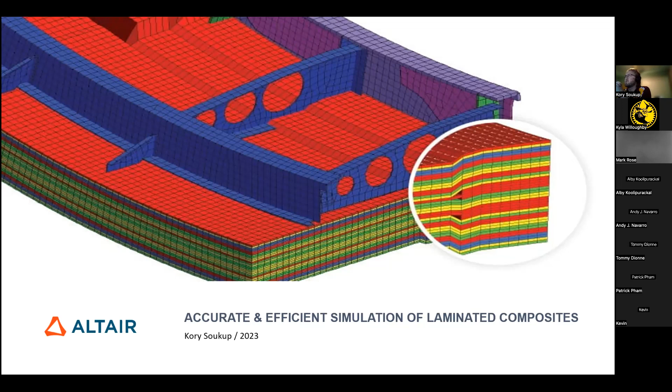So I'm going to start by giving a brief intro into composites for anyone that might be new, freshman, sophomore. If you guys are just getting introduced to this world, it's a pretty cool world. It's riveting. A lot of breakthrough technologies coming out of it. I'm going to demo a model build of a composites model, go through an analysis and post-processing of it. I'm not going to have time in my allotted hour to demo a full optimization problem with composites, but I will walk you guys through what that process looks like. And if you're interested in seeing more, feel free to direct message me and we can schedule some time to do that one-on-one.

I also want to go through some fidelity concerns that people have. I know most places around industry require, and I think even in the BDR, it is required that you submit your composites models using solid elements, aka hexa or tetra elements. That's old news. The aerospace industry is very slow to adopt it, but other industries are already advancing in that you no longer need to model with solid elements. We have this technology where we can model materials within a unit cell, apply that to a shell element or a 2D element, and still not lose any fidelity. I'm going to talk a little bit about that, and hopefully we'll have some time for Q&A.

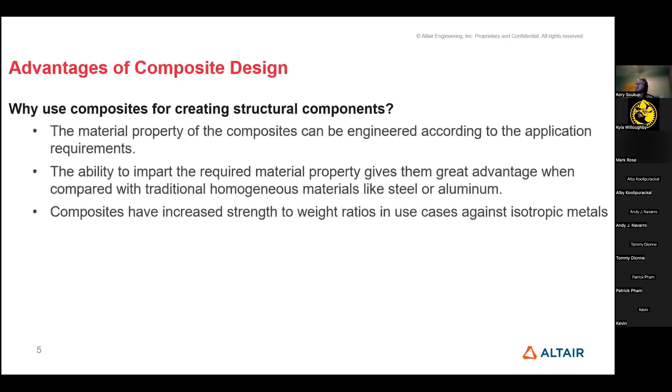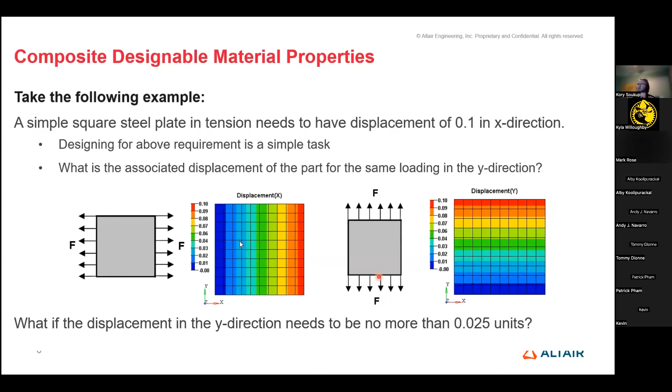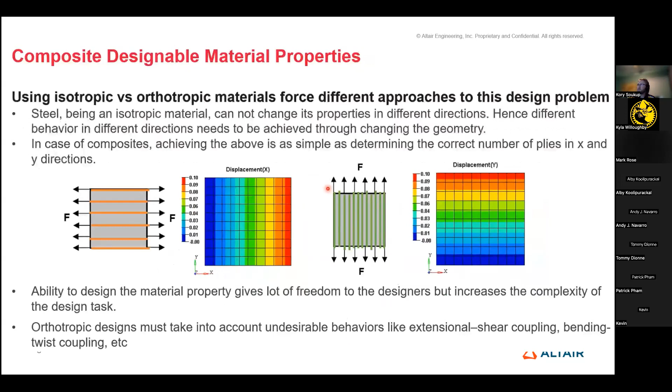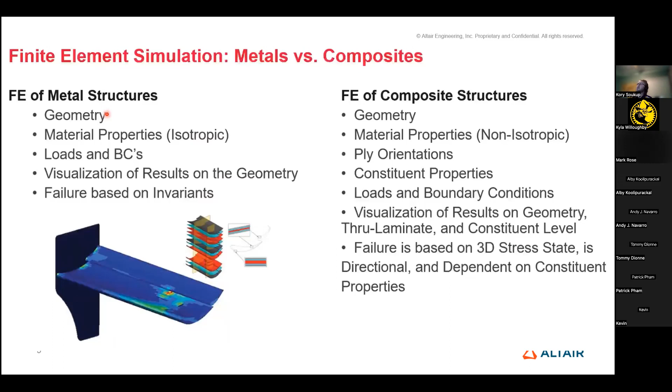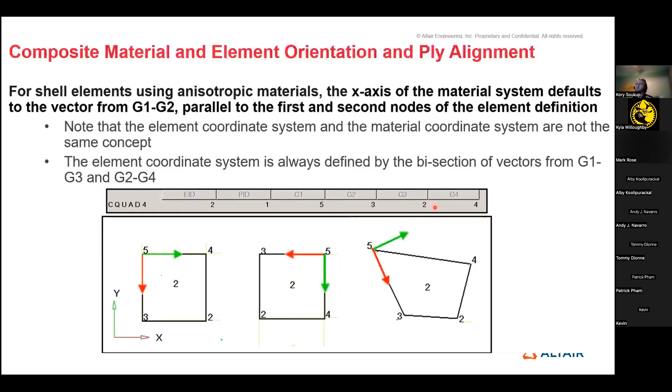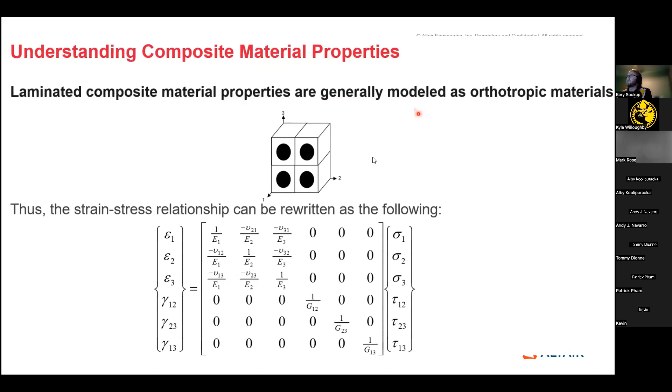And when I was in your shoes, I've seen a lot of teams do their layups without considering the orientation of their plies at all. And no matter how thick you make your part, that's a little bit scary to think about. Because if all of your plies are in the same orientation, it could just be one accident and everything falls apart. It's very important to consider all that.

Okay, getting into the specifics of composites modeling. And again, I know I'm speaking fast. Feel free to let me know if there's questions. Otherwise, hopefully I have some time at the end.

So zone-based data. This is how composites modeling got its start. So back when composites modeling became a thing, we were defining our plies using zones. So I think if I go to the third slide here, this makes it a little bit more clear. We have zone 1, which is this red piece here, zone 2, which is this blue piece, and that's just our ply shape. So this is saying that ply 2 here is only covering this end of my channel there.

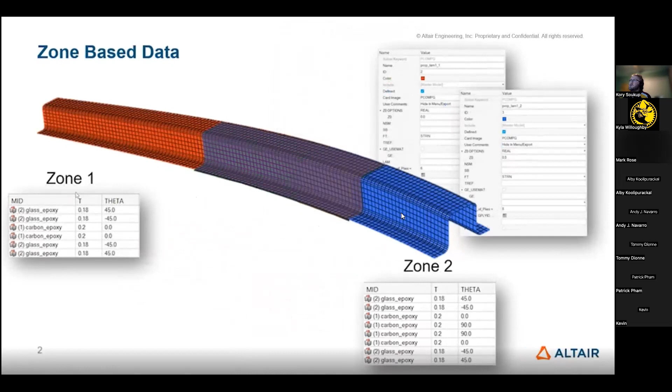If I add another ply that covers the inseam of both of those, I'm looking at 4 zones, right? Because zone 1 and zone 2 have different thicknesses, potentially. So when I add a third ply there, I've now got a different thickness in each of these areas. So now I'm having 4 zones and only 3 plies. This can get a little bit complicated, right? So actually, let me see if I can open up the paint tool. Awesome.

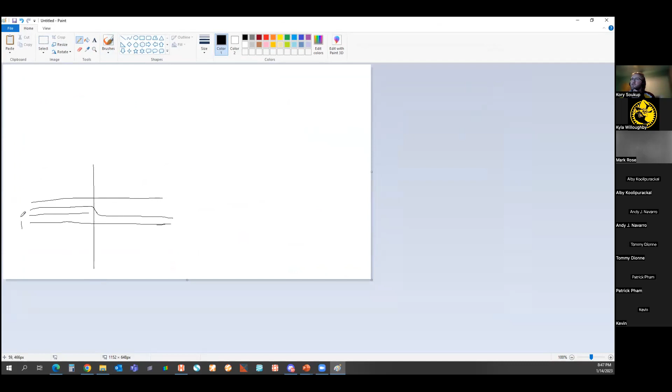So how do I explain this? So if you imagine, let's say I have a ply here, I've got another ply here, and I've got another ply that does something like this. And then we'll just give it one more over the top. Obviously, this is giving us 2 zones, right? Over here, we've got ply 1, 2, 3, and 4. Sorry, that's a little sloppy. Over here, we just have 1, 2, and 3, right?

But you probably noticed that my ply ID of 3 over here doesn't match my ply ID of 4 over here. And this was the inherent problem with zone-based modeling, because if you wanted to quickly change your laminate and you deleted ply 3, you're not deleting ply 4 over here, and now everything is messed up. So then came along something called the PCOMPG, which is global zone-based modeling, or global IDs. And essentially, that got rid of this difference in naming convention, and we were left with 1, 3, 4 over here, right? So now I still only have 3 plies in this zone, but it still recognizes the same ID across.

And this is PCOMPG. It's still widely used in industry. In fact, a lot of people will choose to build their models with ply-based modeling, which I'll get into, and then convert it back to zone-based to solve in other solvers like ANSYS, Nastran, Dyna, etc. But if you're solving in OptiStruct, which is what I'm going to do, there's a much cleaner way, which is called ply-based modeling. And that actually doesn't require us to even define a zone here. So you can eliminate that there. And we're just going to define the plies as they are.

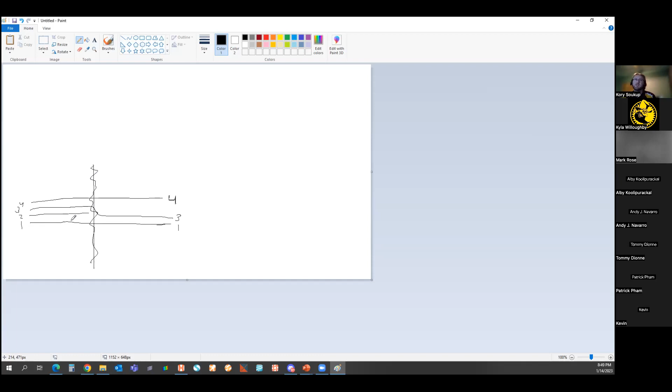So when you build a ply-based model, you're building it as you would on a manufacturing floor. You're defining 1 ply at a time and stacking them in sequence. And you'll see that here as we move forward. I see there's a question here. Is it a good idea to use isotropic properties if using a quasi-isotropic layup instead of getting material properties for orthotropic plies from physical testing?

That's a good question. I personally would say no, simply because of the lack of concern for constituent properties in that case. You could, as a baseline, if you're just doing some initial tests at the start of your design, you could certainly assume isotropic properties for some laminates there.

But even in a quasi-isotropic layup like that, I would venture against it for sure on your final report. It's a good idea to speed up your initial baselines though, and I know I've done that plenty.

So here's ply-based modeling. We're essentially going to define all of these as single plies, right? You don't see any broken up zones here. And if you zoom in where those two zones were separated in the first example, all you're seeing is a ply drop, right?

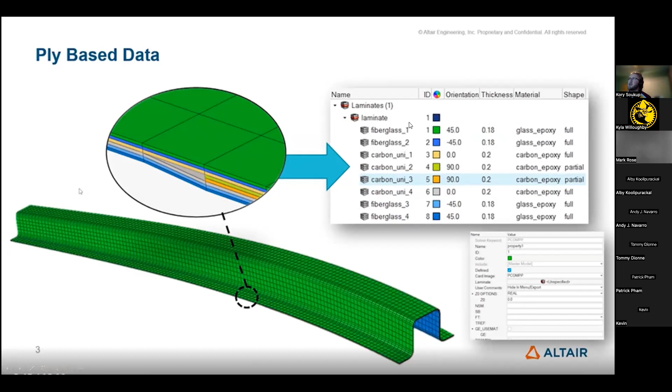So we've got these two extra plies over here in this zone that aren't present over here. This ply drop you see here, this void, is nothing to worry about in your mesh, because what you're seeing is simply a 3D visualization of 2D elements. It's a little misleading, but these aren't 3D elements. We're modeling everything with one 2D sheet and then assigning plies or layers on top of those elements.

So I'm going to skip through these and quickly show this here—typical modeling workflow. We're going to define our stacking direction, which is very important, and that's dependent on your element normals. So that'll be your stacking direction.

Of course I mentioned we want to define our material orientation. We'll create our plies, defining their thickness, material, and shape—which would be those zone 1, zone 2 areas. We'll define all of those plies into a laminate, then create our template with solver-specific attributes. For Optistruct specifically, we'd use PCOMP-P; if you're using Dyna, you might use PCOMP-G, but there's other terminology out there.

And of course, draping simulation is very important at the end as well, because especially on a curved piece like this, if I were to drape a piece of carbon over the top of this, the orientation I'm laying my carbon in isn't necessarily the orientation it will end up in, because it stretches around those curves.

Your fibers will change direction ever so slightly. And of course, you're not going to be cutting out a simple rectangle here—your shape is going to look something like this. So doing a draping simulation gives you a lot of information, so you're not wasting too much dry material before your wet layup.

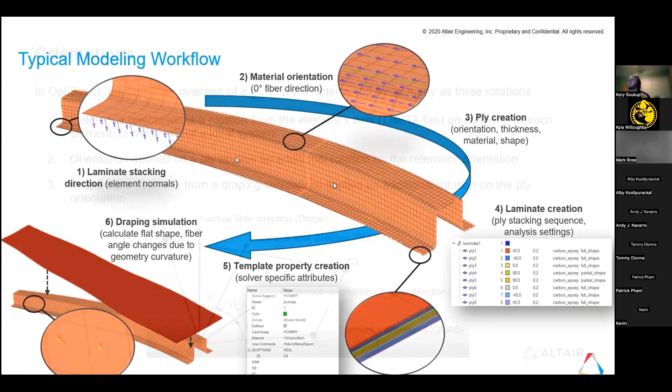All right, so back to orientations—this is just off of that draping concept I just mentioned. Obviously every element has its direction, G1 to G2, that's your element x direction. Then you have your reference orientation, which by default is always your 0-degree fiber orientation.

Your fiber direction then is going to be your ply, right? So if you have a 0-degree ply, this theta here, theta k, will be 0—same as this one here. But if your nominal fiber orientation is 45, then this theta will be 45. Then of course you get an extra theta change based on your drape.

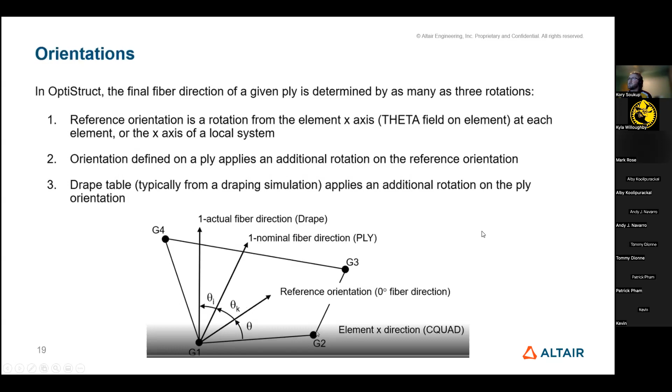So let me jump out of this now and open up the tool here. I've got that same model I showed in those slides, which I figured would make for a quick demo to show you guys.

And I know I'm already almost halfway through here, so I'm going to move fast. As we talked about, one of the first steps in any model definition is checking my element normals. If you're not familiar with FEM, don't worry about the mesh here or how I got the mesh.

If you guys want a quick dry run or short course on meshing techniques and how to properly mesh models for different types of analyses—because your meshing is very different for CFD than it is for a structural model.

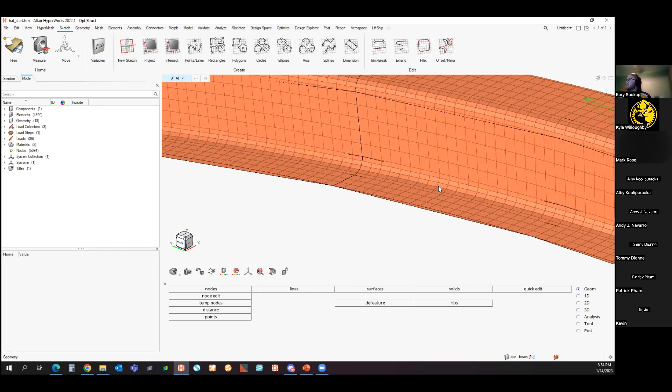But here, if I zoom in, you'll notice that in this model we just have some 2D elements, right? No 3D hexes, no tetras, nothing like that in this model yet. All I've got is the surface and some 2D elements there.

First thing I want to do is check my element normals. Again, I'm not going to treat this as a full training, so I'll move quickly through the button clicks here. We can give you training later on if you reach out, but I'm just going to demo what we're doing here.

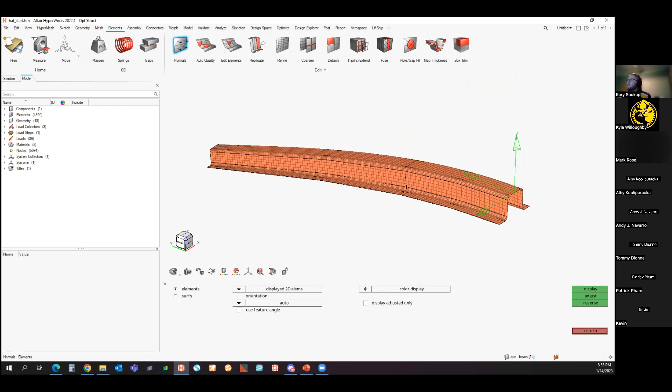So I'm going to view my element normals here. You can see that I've got this red and blue. Red is the positive direction of my vector.

Let me try to change this here, make it a little bit more clear. So if I zoom in here, you see my positive direction is pointing outwards there. I'm just going to go ahead and reverse that. I'm going to treat this as the inside of my mold, and I'm going to lay my plies on the inside of the space here. So I want my direction facing inward, like you see there.

All right, next thing I want to do is open up Composites browser here. And I'm going to create a material reference orientation. This is to make sure that all my elements are facing the same direction.

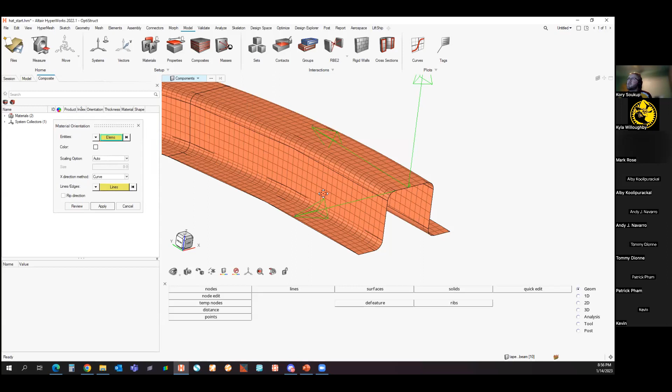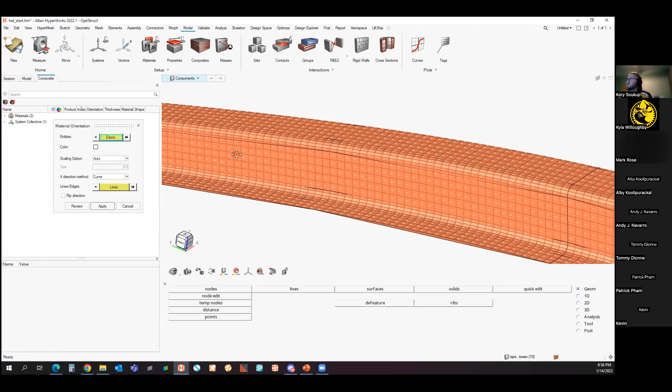So let's select all my elements to start here. All right, so I'm just hitting review to start. This is what my elements look like from the get-go, and this is the default, using my system axis here. So I could assign everything to my system ID, which would just be selecting that there. And I can put in custom or local rosettes - local coordinate systems anywhere I want in my model to change my orientation there.

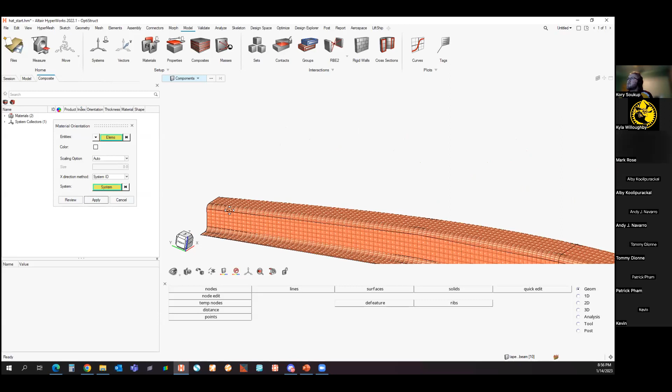So if I hit apply, you'll see that doesn't change, because this rosette is set to the same orientation as my global axis here for the most part, at least in the Y and Z there. Now, if I change - let's do this.

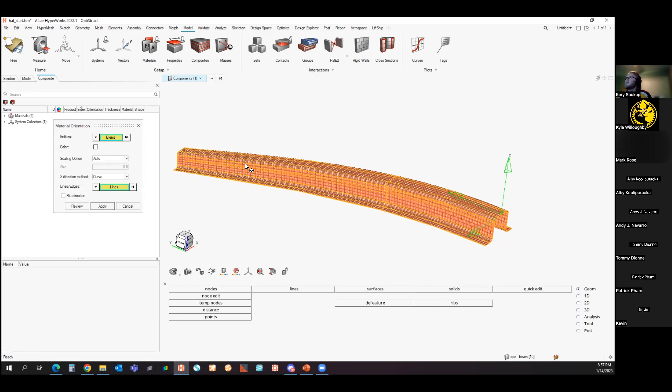All right, I'm going to change this to curve, and I'm going to select my lines. I'm going to change a setting in here that I don't necessarily like. All right, let's try that again.

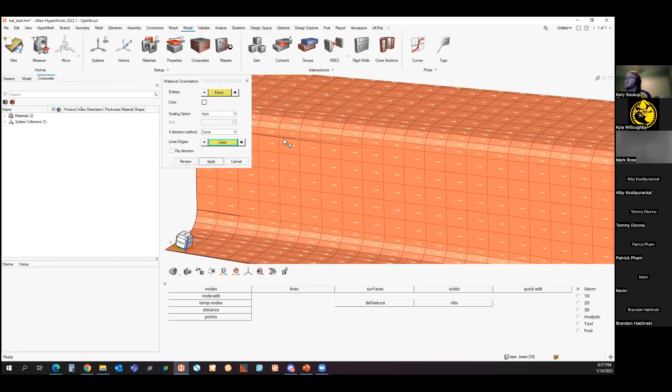There we go. Select my two lines, and let's hit apply. Now, if I zoom in here, you'll see that all my orientations follow that curvature. There's a bending up here because of the bend of this piece.

I'm actually going to flip the direction though, so everything's facing over in this direction still. So now it's following that curvature. That's what I want. I'll go ahead and hit apply, close that, and my material orientation is set. So that's going to be my default zero direction.

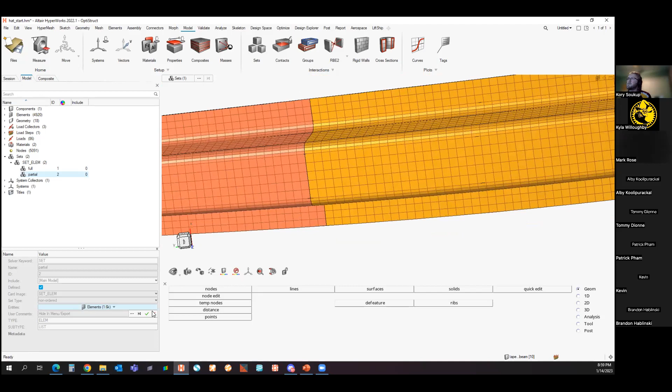And I'll create a second one here and we'll call it partial. And this is just gonna be this piece over here. All right, I think I got it all there. Hit OK. So now I've got my two shapes there.

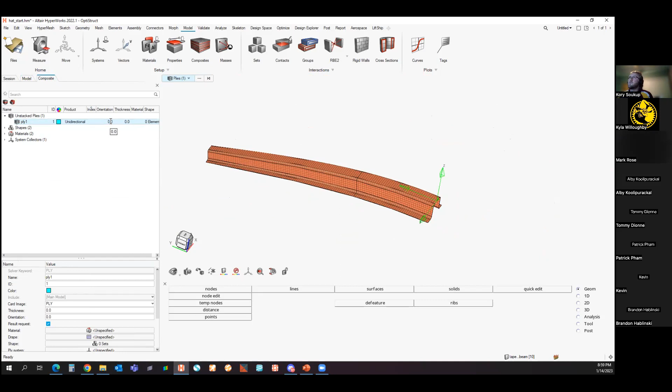So now I'm going to use those shapes to go ahead and create some plies. So ply 1 here, we'll leave my orientation at 45 degrees. We'll give it a thickness of say 0.2. I'm going to assign my material here as carbon epoxy, and that material I already had predefined here to save time.

But essentially what I've done is I've created two materials, carbon and fiberglass, and I've defined their properties down here. Both Mat 8 cards you see here, that's telling me that I need orthotropic properties assigned to both of those. So those are defined.

One thing I'll mention on this too, and this is a little bit different from what you probably saw earlier in Eric's presentation, is that HyperWorks here, being that it's a different interface, is completely unitless. So any model you bring in from CAD, if you're using the metric system or imperial system, it's going to come in that system. So all of your dimensions, all of your material properties need to remain consistent within that measurement system.

But if you want to change it, it's up to you to go in and modify these values accordingly. The default is always going to be steel - if it's blank and then populates a default number, that's the steel value of that number. But again, it's unitless. It's up to you to make sure that everything is consistent. It's not going to error out if you've put E1 with the imperial units and E2 with metric units - it doesn't know the difference. So it's up to you to make sure everything's consistent.

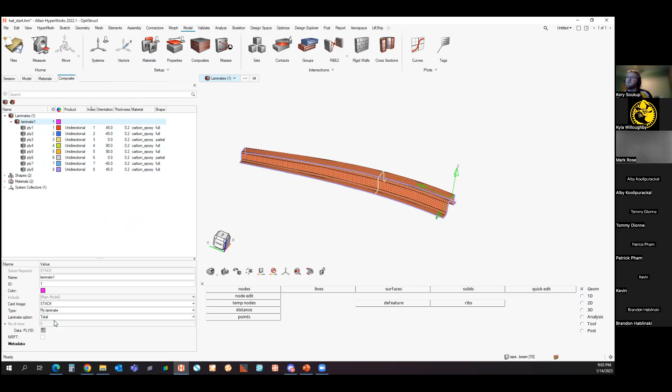Well, let me hold off on that for now. Show you guys what this looks like. So I've got my laminate built.

One more thing I need to do is define a property, and this is for the solver that you're going to be running it on. So if it's Optistruct, you want to use the pcomp-p. pcomp-g, pcomp, and pcomp-ls are all available as well. LS is what you're going to use if you are modeling with solid core material.

So typically for these competitions and the teams I talk to, if you're going to be modeling with the core material, you want that core to be modeled as a solid element, and then your shell elements will be around it. So your pcomp LS will be defined or assigned to your core, and your pcomp P will be assigned to your actual plies.

And I'm going to kind of skip over that for now, just because I don't know how much time that would take to go into detail on. I'm going to assign this pcomp P, and then this is just going to be my Z offset. So I'm going to set that to 0.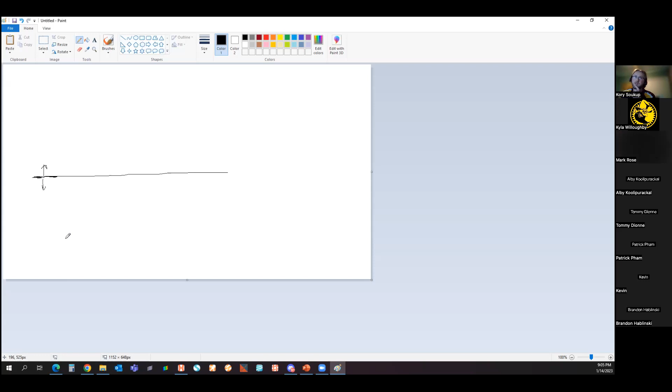Again, to be clear about what I'm doing there. If this is my surface that I've meshed, by default, when I assign my laminate to those elements, half of them are going to be on this side and half on this side. So this is the midplane of my composite, right? If I set Z0 equal to 0, it's telling me to stack from the 0 point of my elements in the element normal direction. So if my element normal is facing up, it's going to start here at Z equals 0 and stack up, ply 1, 2, 3, and so on in that direction.

If I had Z equals minus T over 2, so minus half of the thickness, then of course it would start down here, and that's the default. It's a lot of different options you have there.

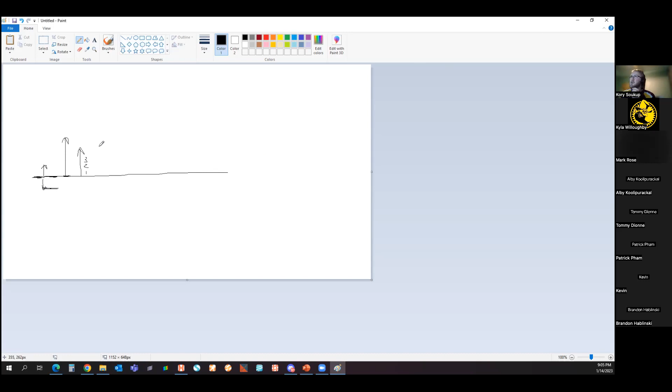And this becomes important if you're dealing with interface laminates, right? So for example, an I-beam, right? How would you model this with composites? The element normal here might be going in this direction. Here it might be going in this direction, right? So what happens when you have a ply that wraps around these two here? These elements are now being stacked, or these plies are being stacked in a different direction than these elements here, right? So then that's when we use something called interface laminates, and we can readjust these parameters here.

Again, I'm not going to go into that much detail on this model. We'll keep it very, very simple here. So Z0, that's what we want there. And that should be all we need just to visualize it.

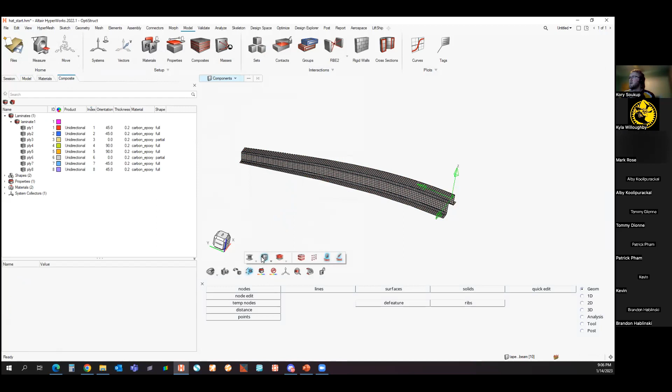So now what I can do is change this to property view, and I can show you guys what this now looks like. Did I assign? Oh, hold on. I need to assign my property to my component here.

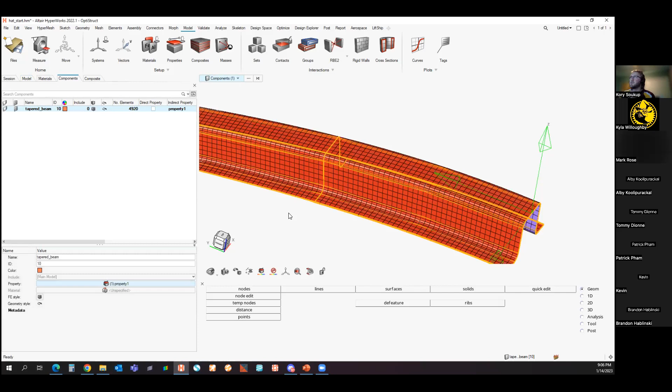It's easy to forget the little things. All right, so here's my laminate that I just created. Remember, plies 3 and 6 are the two plies that I only assigned to the partial side here. So this here is the ply drop.

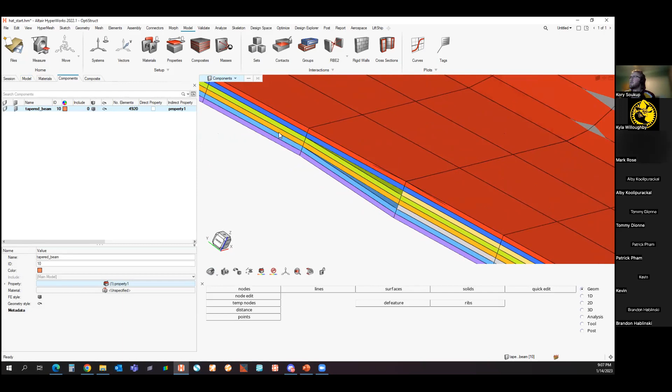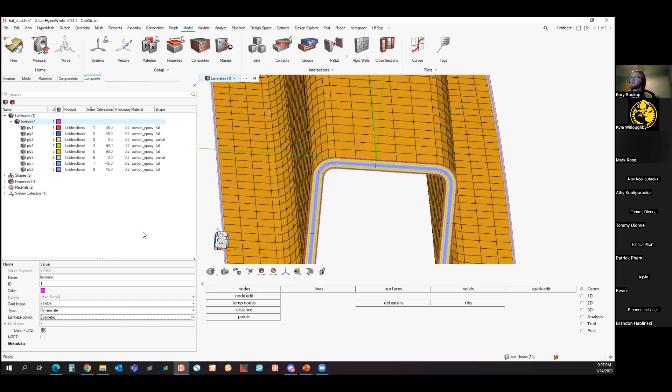So I've got a thinner laminate over here than I do over here. If I go over here again, you can see the plies a little bit more clearly on that end. Now, if I change my laminate to be symmetric, you can see that thickness just doubled. I've just made my laminate symmetric around Z equals 0, so I've got those voids on the top and bottom there, my center plane.

But again, remember, this is only a visualization. If I turn off these features, I'm still looking at shell elements. All of my boundary conditions, constraints, loads, everything is assigned to these elements here. I don't have to worry about assigning everything to those 3D spaces on the side. Those are just for visualization purposes.

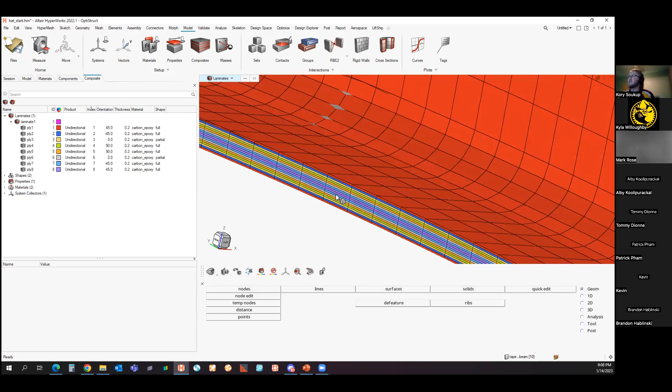All right, so my model is defined. Before I run my analysis, let me skip a step here and show you a couple other things that are in this interface before I leave. And that would be one being the draping. So let me show that first.

If I right click on laminate here and go to drape, this is where I can define my ply shapes, my drape angles. So what I'm going to do here is turn off these first.

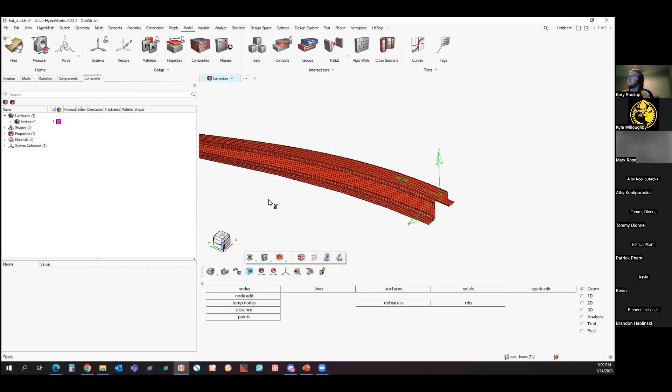Go back to drape. I'm going to select my seed point - this is just the point where your ply is going to touch the part first, where it's going to touch the mold first. So we'll say I lay it down right there. I'll hit apply, and this will give me all those flat patterns that you guys really need for your manufacturing.

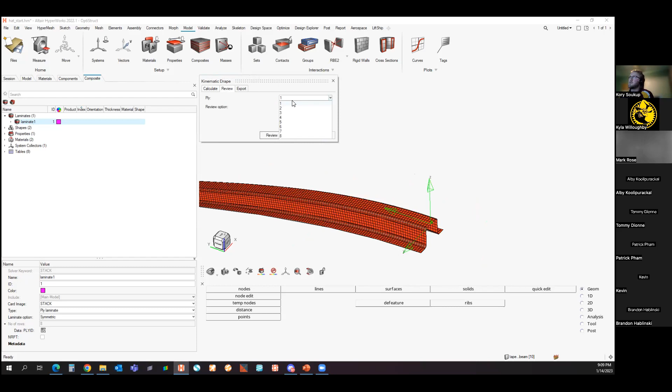So right now it's going through all 16 plies that I have in my model there. For example, go to ply 3. Let's review the drape mesh - that's what my draping is going to look like. You can see the orientation changes ever so slightly.

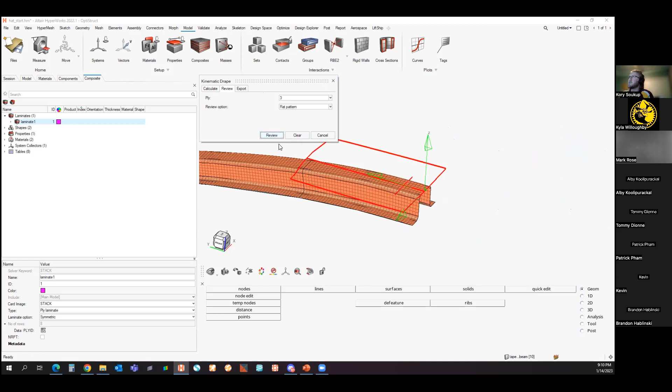If I go to the shear, this is going to give me the shear pattern on that particular ply. And I can also take a look at the flat pattern - that's the actual shape that I want to cut out. And I believe this was ply 3, which was in the 0 orientation.

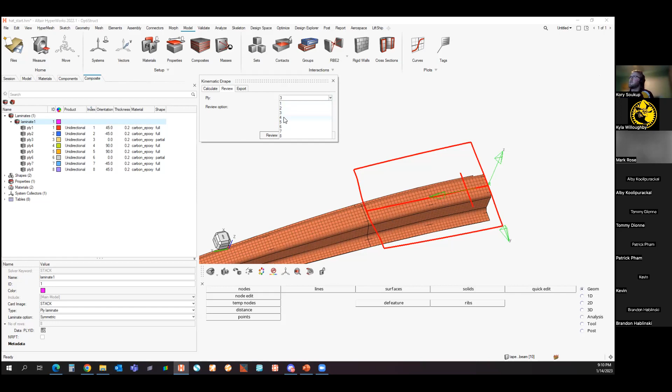No, so this makes sense - I'm cutting it in this shape, and this here is pointing in the fiber direction. So I want my fibers in that 0 orientation that I defined previously. If I go to ply, let's go to 90 - so ply 4. Now you're seeing my orientation is in the 90 and my ply shape here.

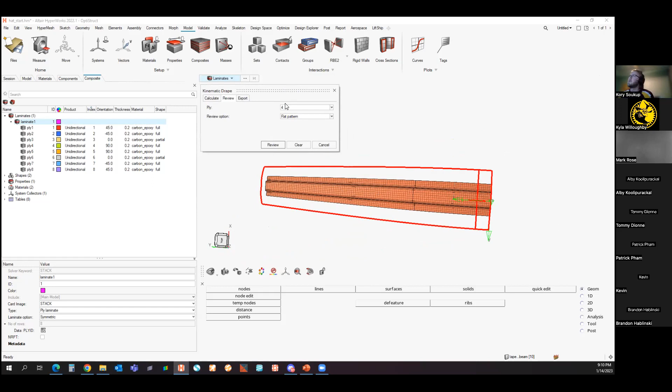And of course, I can export these as DXF files, so you can use them to trace and cut your plies in the clean room when you're building your part. So it makes it very quick, very easy, and you're no longer wasting so much dry material in your labs. I know that's hard to come by on those student teams, relying on sponsors and all.

Let's see what else. I want to show the stress toolbox here. This is not new, but it's something we've changed recently to make it more accessible.

And what I can do is go into my laminate here, I'm going to analyze engineering constants. This allows me to take a look at all of my matrices for that laminate in both zone 1 and zone 2. So this is for zone 1, I've got 12 plies. I've got my ABD matrices here.

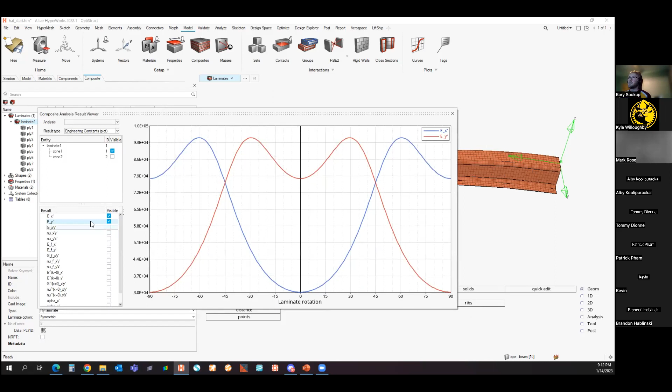I can change this to a plot, so I can take a look at my stiffness in the fiber orientation, my stiffness in the matrix direction, and understand that my 0-degree plies were over on this piece here. So for zone 1, my strength in EX should be actually very low in the 0 orientation, because all my 0 plies are in this shape here. But it should be strong in 0 for zone 2.

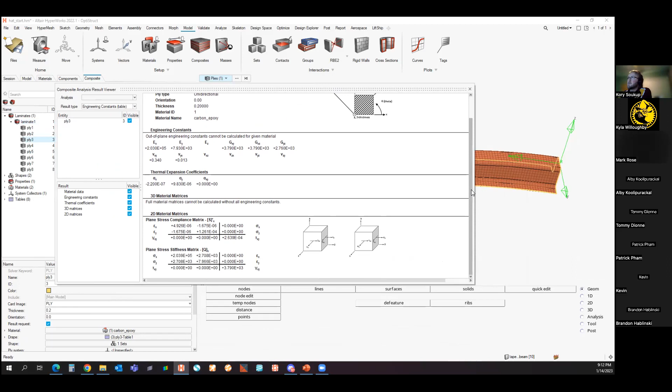So let me actually look at a ply here. If I open up ply 3 and do that same thing - yeah, so again, we've got our out of plane constants, our 2D and 3D matrices there, our homogeneous matrices. Let me look at EX. So yeah, for that particular ply, of course, we're strongest in the 0 direction. In EY, we're going to be weakest in 0, maxing at 90. So that's exactly what we'd expect for that particular ply.

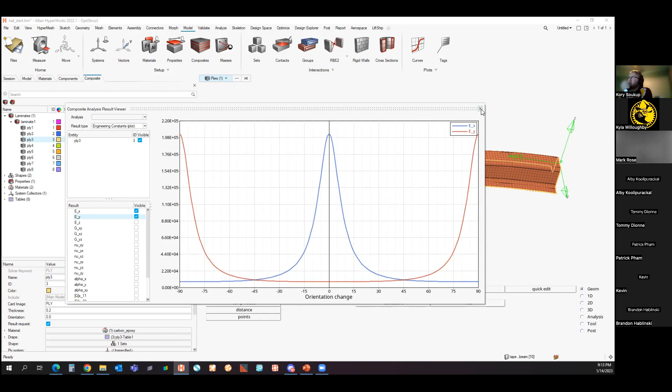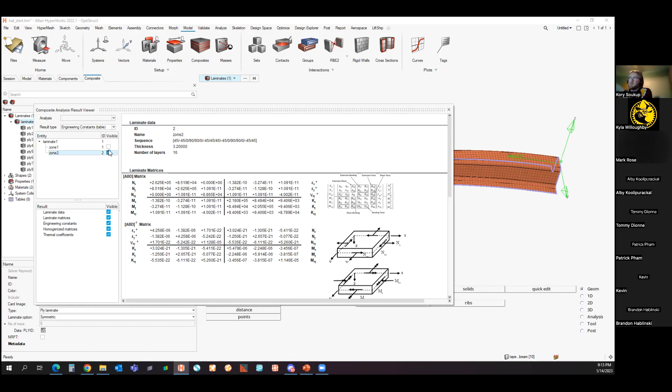So this will tell us, if we're looking at it at the laminate level, in which direction are we weak. We'll figure out our weak point and make sure that we're not going to experience any loads in that direction, whether it's tension, compression, or whatnot. And all of these results are given for both tension and compression if you're building them with the material modeler that's in-house here, which I'll show briefly in a bit.

I'm trying to think if there's anything else I wanted to show before I move on here. One thing - I know a lot of you guys don't solve your solutions with Optistruct. If that's the case, I don't want to be biased.

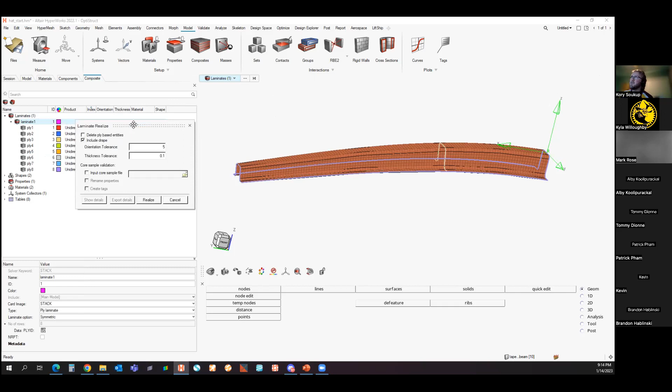So if you wanted to build your model like this and then solve it in, say, ANSYS, Dyna, Nastran, whatever you have, what I would do is build your model just like I did here. Then I'm going to right click on my laminate and say realize. This changes it back to that zone-based definition I talked about, that PCOMPG property. That solver deck can be imported into ANSYS, for example, or Dyna, and you can use it to solve the model there.

Otherwise, if you're in HyperWorks, you might as well use Optistruct - it's right there for you. But it's completely up to you guys.

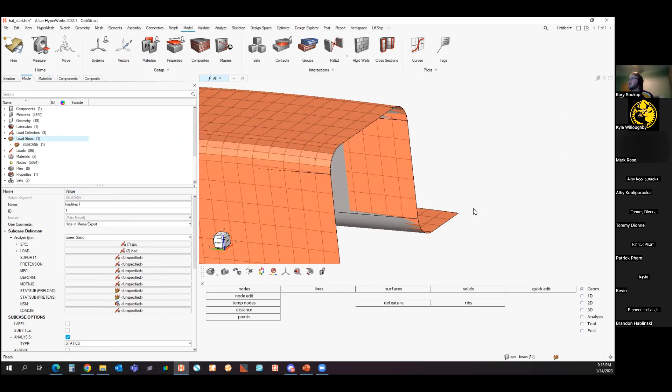So with that being said, let me go ahead and run this quick. Let me show you the loads assigned to it so you know what's happening here. Over here on the right-hand side I've got all my constraints - I'm constraining that end, and I am loading this end in compression. So all of these nodes have a loading that is pointing in the inward direction.

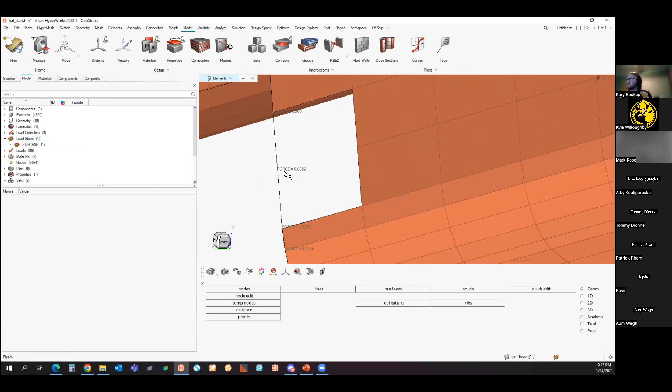So if I - hold on a second. Yep, yeah, it's all pointing inward. So this is in compression. Just wanted to make sure I wasn't going crazy there. So that's the setup I have here.

Another thing I want to do before I run this is make sure I request the proper output for a composite solution. So I want my composite strain and my composite stress, both in H3D formats.

Here it's going to ask for type, and also for number of divisions - this is for each individual ply, so I can look at results on ply 1, ply 2, ply 3. If I increase this value to say 2 or 3, that's how many times it divides that individual ply up, so we can get the peak stress or peak strain at the top and bottom of the ply, which becomes very important if you're focusing on the constituents. For your case on these cars, I would just leave that at 1.

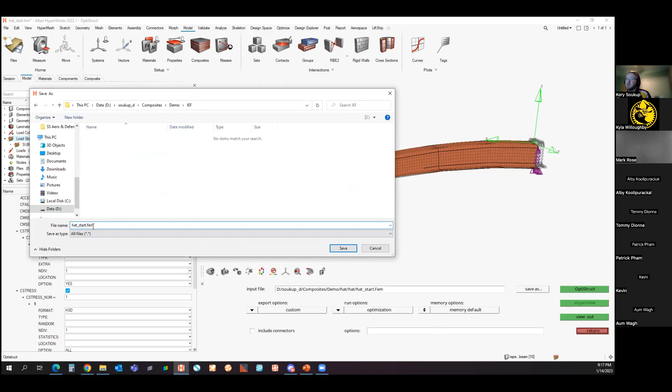But with that being said, we'll go ahead and run it here. I'm going to put this in - let me create a new folder called IEF, and we'll give it a 22. This should run fairly quickly, in a matter of 10-20 seconds, and then you can take a look at those results here.

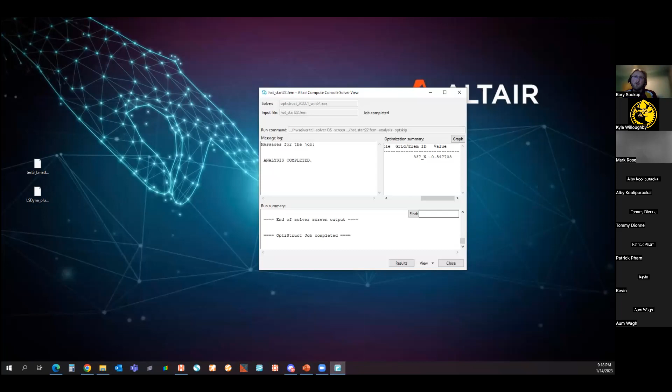I don't know what happened to it. Oh, there it is - it's hiding on my other monitor. All right, so that ran pretty quickly. It's already done, we can take a look at our output file quick.

Gives you some model information here, number of elements, etc. Okay, so this is what I want - here's my volume, mass, there's my stiffness information.

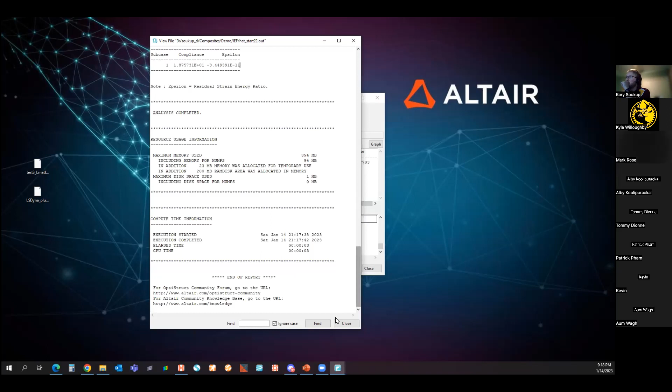All right, let's go ahead and open that up again, and I'm going to open a new page here in my session, and we'll pull those results in to take a look at how our piece did under loading.

Again, we only had the one sub case here, so that's the only thing we need to worry about. We'll take a look at our composite strain. Simple - let's turn on our mesh again so we can see where our strain is happening here. So this is obviously our peak strain. I can take a look at this for individual plies.

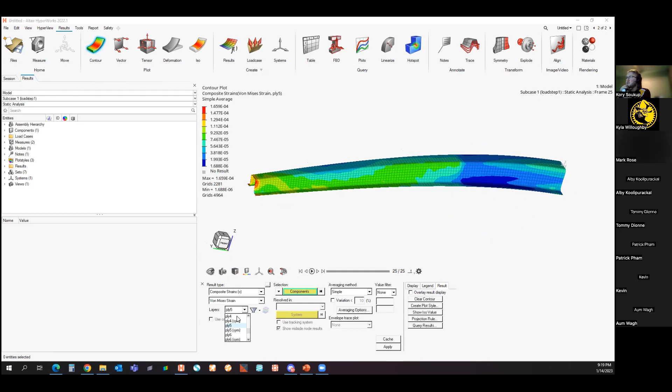So maybe we'll go to ply 5 here, see what that looks like. And I can jump between every single ply in my laminate and take a look at the stresses and strains on each individual one.

Maybe I want to take a look at the total displacement for the entire laminate. I can animate that - maybe we'll scale that up so you can actually see what it's doing there. Remember it's constrained on this end and it's in compression over here, so it is behaving how we'd expect - so we've got our sanity check there.

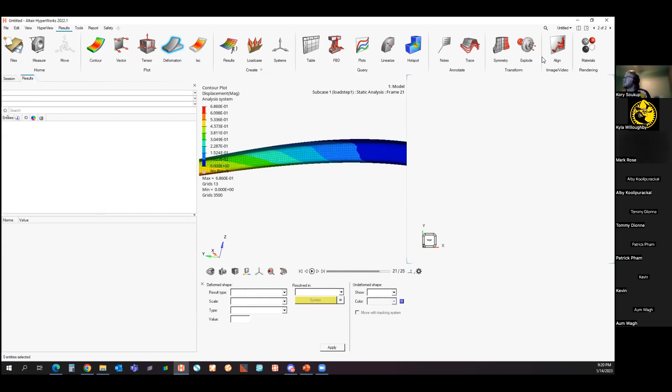But I can go through and modify this. Maybe one thing I can do here is create another window, and let's jump back to my model here. And I'm going to change - let's get rid of this symmetric definition here, right? So now, again, we've only got the 8 plies now.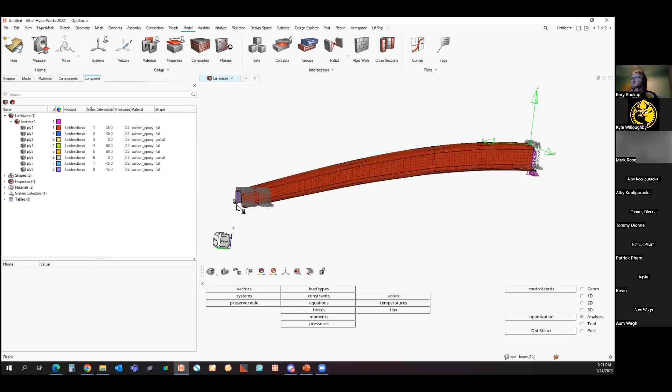If I zoom in here, you'll see I've only got the 8 plies now. There's 6 on this side. There should be 8 over here on the other end. Yep. So now we'll go ahead and run that one as it is. I'll just say 8 plies.

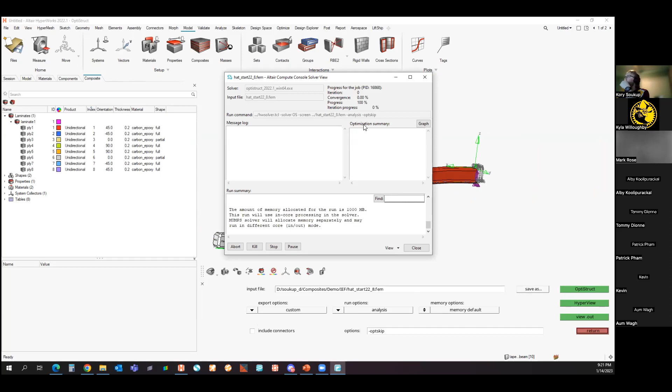And there it is. So again, should run pretty quick. Go ahead and close that. Open up our post processor again.

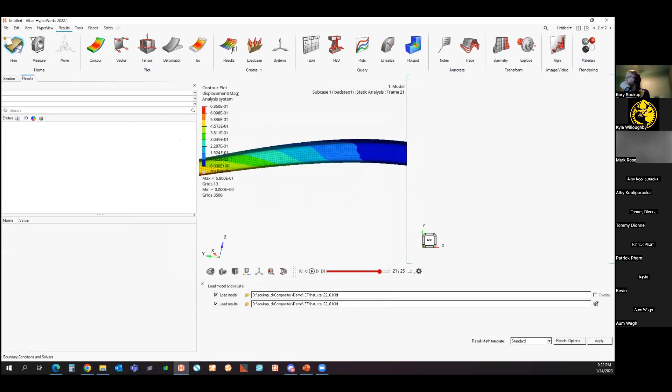All right. And we'll compare our displacements. Peak displacement over here was 2.6. Over here, we're looking at 0.7. So obviously by taking away those extra 8 plies, we got a much weaker part. So we can go ahead and compare those side by side like that.

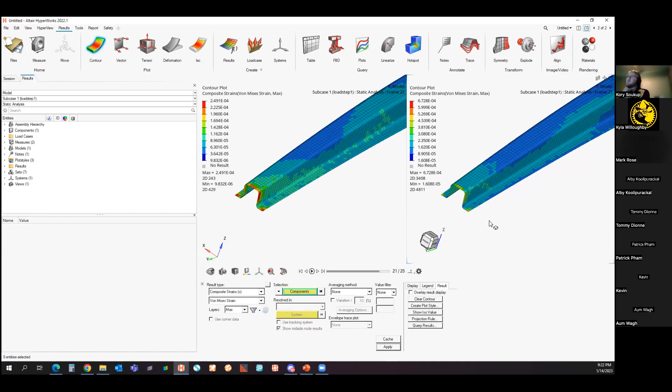So very good comparison. Nice tool to utilize to make sure you're understanding your results and defining everything appropriately. Since we've got about 10 minutes left here, I want to just quickly breeze through these other topics here, talking about fidelity that I promised. And then we'll get into some Q&A.

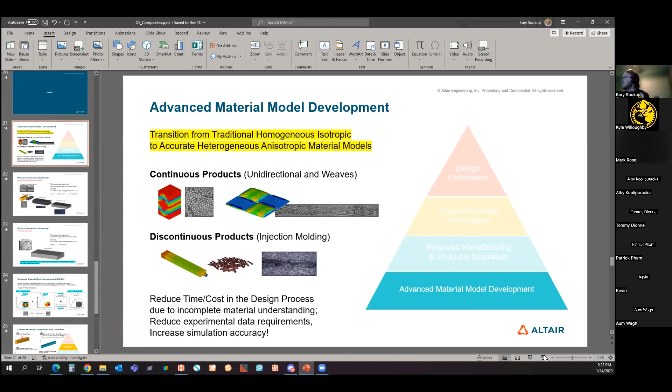All right. So this is something not necessarily new, but it is something that is just starting to take hold in industry. So I'll say if you guys can learn the concept of multi-scale modeling, it's going to put you in the front of the line when it comes to pursuing a career in composites, because this is the technology that every industry wants right now, and is just learning about.

So essentially what we're going to be doing is modeling even core. Everything we need to model can be modeled with shell elements, no longer a need for solids. And what we're going to do is create a single unit cell, a material model that we're going to plug in. Instead of our MAT 8 card, we'll create a MAT MDS card and plug that material model into our model

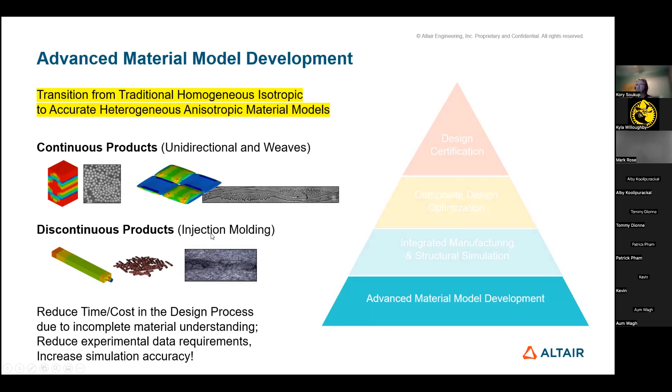to give our 2D elements a definition of a 3D unit cell that is in itself modeled with 3D tetras or hexas. So we're not losing any fidelity. We just got it pulling information from another tool, from another material database. And this can be used for unidirectional, continuous products, as well as discontinuous products like injection molding. So very widespread.

And this is the general idea that you should understand here, that everything comes in a scale. So let me jump to this slide first. This is a typical example of a metal, right? You probably heard the term black aluminum, right? Black aluminum is this idea that even when we're dealing with composites, we can treat the entire laminate as a homogeneous part, as an isotropic part, we just assume that this is one material model. We average everything through the plies and we just do our analysis on the laminate.

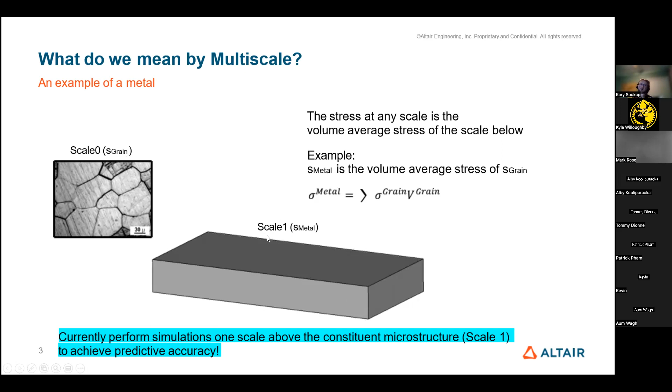That is not okay anymore. That's how things used to be done, and that's how metals are done. So we were under the assumption that that's okay. The understanding here is that obviously scale 1 is the average of all the stresses and strains on the scale below it, right? So in the metals case here, we've got our grains and boundaries averaged all together gives us scale 1, or the ply level in metals, right?

In a composites case, scale 1 is not the ply level. Scale 1 is fibers and matrix. That's our individual constituents. So up till today, we've been modeling everything at the laminate level, even the ply level in some cases now, but we're still building our boundary conditions and solving our models at the ply level, and we're neglecting this scale that's between our matrix and fiber and our ply, right? So we're solving metals at scale 1. Why are we solving composites at scale 2? That's the big question, and that's why people aren't getting accurate results in composite simulation.

And so this is where you want to model on your fiber and matrix. Make sure you're pulling those results out the way they should be. And that's this idea of multi-scale modeling and why you should plug that into your shell elements instead of modeling with 3D. I'm not saying there's anything wrong with 3D solid modeling. Certainly you can go about that, but it takes a lot longer to solve your model, right?

Your runtime is significantly increased. It's a little bit more complex. It's not as forgiving, especially when you're hex meshing. Your surfaces have to be aligned with each other. It's so much easier to model with shells and then just assign a material model. So this is a much preferred route.

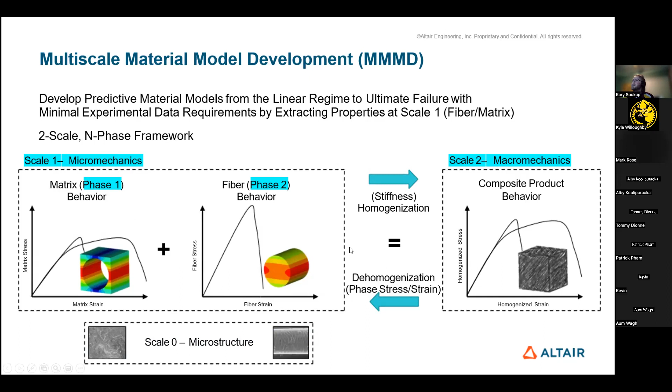And then of course, the dehomogenization phase, right? So we'd still model our part at the ply level, we'd solve it, and then we dehomogenize it into matrix and fiber, and that's why we get those differing results. So it's a process, and I'd be happy to talk to you guys more about it if you wanted to later.

And then real quick here, before I wrap it up, composite design optimization with OptiStruct is very similar to what Eric showed earlier today with lightweighting. We're still going to use the concept of topology optimization as a first step. So we're going to take our design space here, we're going to constrain it, we'll apply a load. We're going to give it a total design space that is maximizing the bounding volume that our part can take up in the assembly in our vehicle model.

We're going to run a topology optimization on that, and that's going to figure out the most efficient part shape, the most efficient ply shape. If you're familiar with topology optimization, you know that what it's doing is optimizing the density that's assigned to each individual element. If that density is 0, it's saying remove that element. We don't need it. And that's how it removes the material. If that density is 80% or higher, that element is critical to the load path. So we want to keep that element.

So first and foremost, we're giving it a ply shape. Next, we're running a free size or size optimization, and that optimizes the thickness of each of those remaining elements. And that tells us how many of each of those plies we need. And finally, we know our ply shapes. We know how many we need of each of them. The last step is to optimize the stacking sequence. And that's called the shuffling optimization. We're experimenting with different approaches of that now as well. But shuffling optimization is the current approach that's recommended.

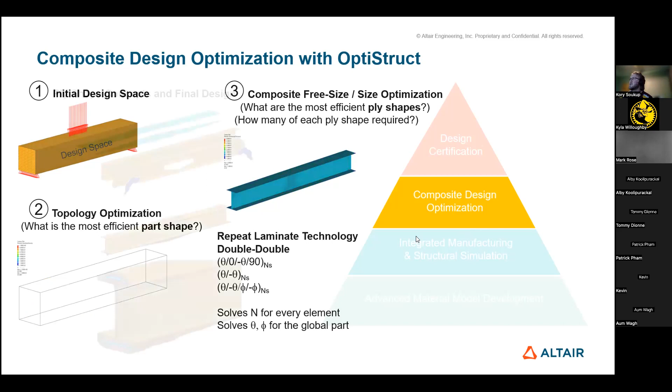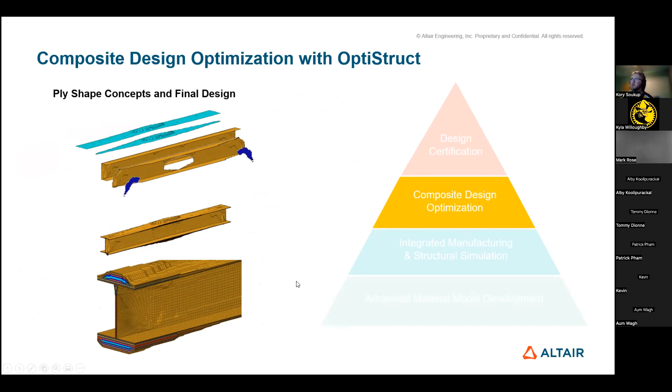So this is just a general workflow here. You've got your ply shapes, your ply thickness. Eventually it'll build into a nice model like so, right? And then you'd use this to interpret your ply shapes and cut them out accordingly.